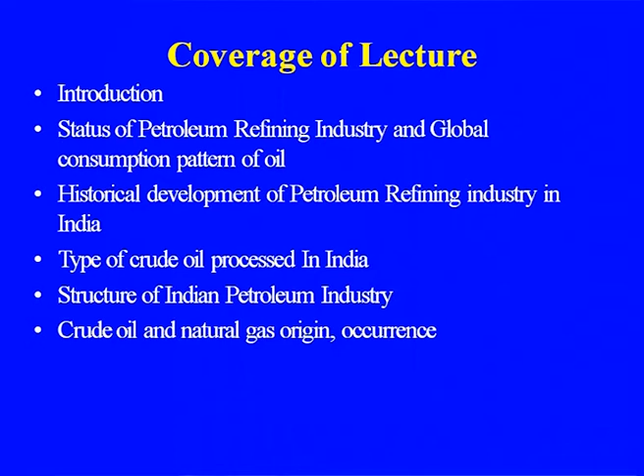Then the structure of the Indian petroleum industry, crude oil, natural gas origin, occurrence, oil and gas exploration and drilling, composition of crude oil, types of petroleum refining processes, and the changing scenario in gasoline and diesel especially.

There has been a lot of changes taking place in refinery configuration just to meet environmental standards as per the Euro norms or the Bharat norms, and the specification of gasoline and diesel that is changing time to time looking at the environmental condition.

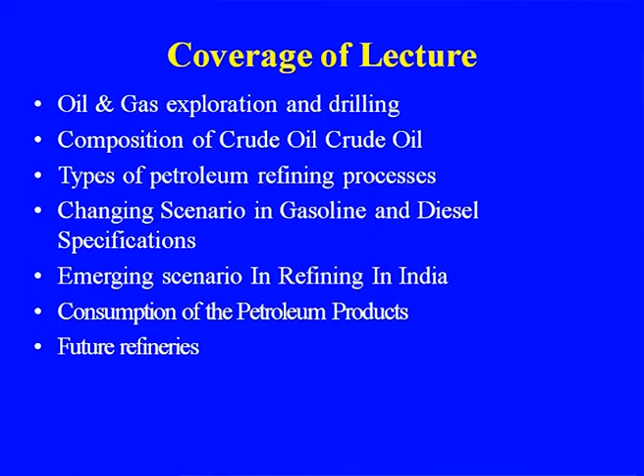Emerging scenario in the refining industry in India, because there has been a lot of changes, a lot of problems because of the non-availability of crude, volatile market of crude oil - all those factors are affecting the overall growth of the petroleum industry. We will be discussing some of the problems which we are facing.

Then the consumption pattern of petroleum products, because the various uses are very important in case of petrol. Each and every drop of oil, each and every barrel of oil is very important, and if you are not utilizing it properly, then the overall economy of the refining is definitely going to be affected.

And the future refining - because the concept is now changing, to have more value added products and to incorporate the various developments taking place, keeping in mind the environment, keeping in mind the availability of raw materials - all those factors we will be discussing as the concept of future refining.

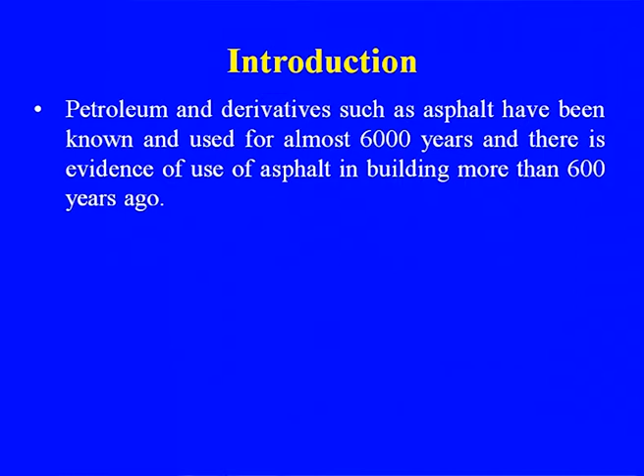Let us come to petroleum refining. Petroleum and derivatives such as asphalt have been known and used for almost 6,000 years, and there is evidence of use of asphalt building more than 600 years ago. But it was not actually known as petroleum - some oil was just available.

Modern petroleum refining began in 1859 with the discovery of petroleum in Pennsylvania. This is near New York, you can say - just side of New Jersey, one side is Pennsylvania, another side is New Jersey.

So this is Pennsylvania, and subsequent commercialization of the various processes - there is a lot of change in the process of refinery operation, which we will discuss through the whole petroleum refinery lecture, containing 8 lectures covering different sections and developments. The exploration of petroleum originated in the latter part of the 19th century.

So as far as the petroleum industry is concerned, now you cannot survive, you cannot imagine a life without petroleum products. Petroleum industry is playing a vital role in industrialization and urbanization and meeting the basic needs of mankind.

By supplying energy for domestic purposes, for industrial purposes, for transport sectors, and we are finding the revolution in the automobile industry because of the availability of more and more fuel, and at the same time some of the products which are available.

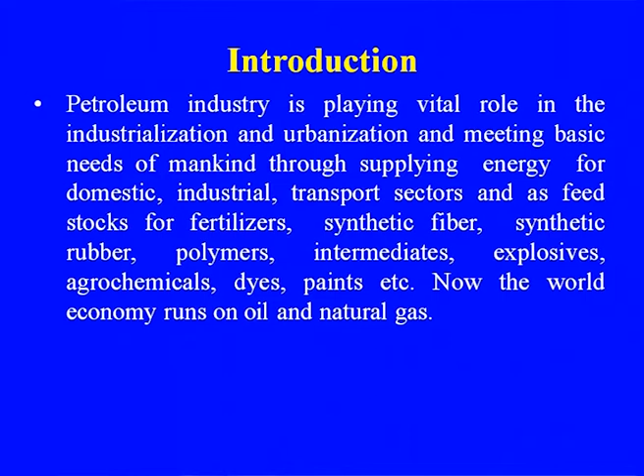And as feedstock for the fertilizer, synthetic fiber industry, synthetic rubber, polymers, intermediates, explosives, agrochemicals, dyes - these are all we will be discussing in much more detail while discussing module 7 and module 8, where we will be discussing the petrochemicals which are derived from the petroleum industry.

Already we discussed some of the chemicals which can be produced through the non-petro route, based on the utilization of biomass, utilization of ethanol, or the coal gasification, coal to chemical route. All those things we discussed, but here in module 7 and module 8 we will be discussing the development that has taken place because of the coming of petroleum products. So intermediates, explosives, agrochemicals, dyes, paints, all those things will be discussed.

Now the world economy runs on oil and natural gas, because any industrialized country, anywhere, cannot survive without oil and natural gas. We are using it in some other form, whether you take LPG, gasoline, or diesel - the whole transportation sector is depending upon diesel, because that is the only alternative route now left.

And it is the economic way of transportation of raw material for various products. So the importance of the petroleum refinery you can just imagine, because it is not only providing fuel or energy, but it is also providing a very important role through the raw material which is available to the fertilizer or petrochemical industry. Intermediate, explosive, all those industries are using the product produced from the petrochemical industry.

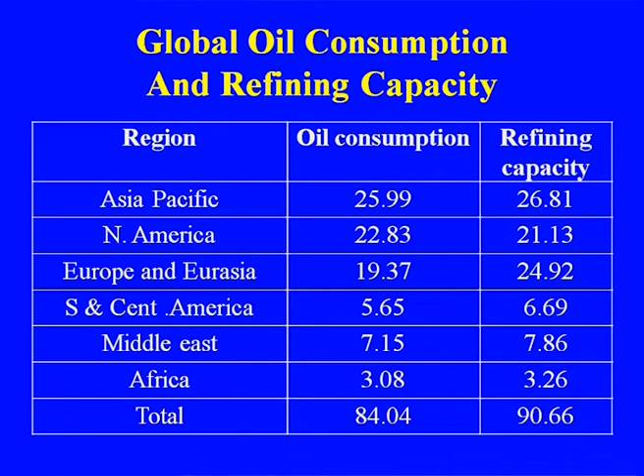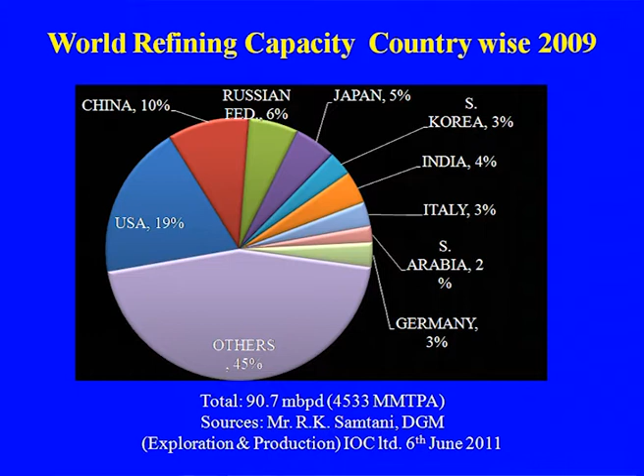And then the world refining capacity, country wise, this is the figure that we are having. So from this figure you can see the US has the major share, but one of the interesting things is that although other countries - it may be America or Southeast Asia - are having large refining capacity and producing, the basic raw material which we are producing is only from the Middle East and some other parts of the world. So the major suppliers of the raw material are the Middle East.

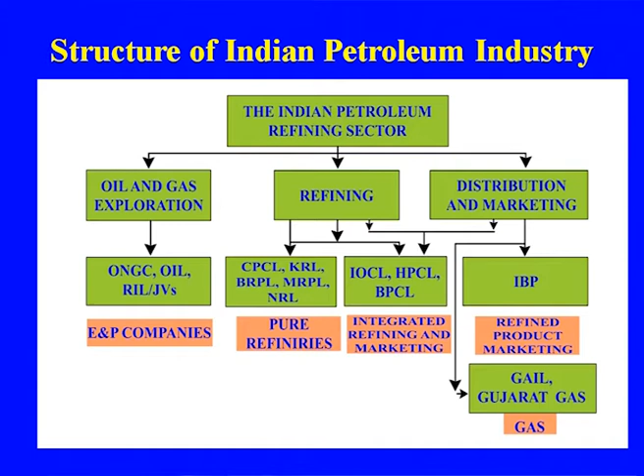Refining - a large number of refineries we are having, and new refineries are coming. Then the marketing, because refining we are having under private sector and public sector, there is distribution and marketing of the products. Some organizations were developed just for marketing - take the case of IBP, they are not having any refining, but they are doing the marketing part.

Apart from this, the Indian Oil, BPCL, HPCL, they are all having their own marketing distribution system. So this is about the structure. And one of the major players in case of gas distribution is GAIL, which supplies the gases being processed at various parts of the country through pipelines.

And one of the gas pipelines available through GAIL was the HBJ pipeline. Long back they started supplying natural gas to some fertilizer plants, that is your Hazira to Bijaipur and Jagdishpur pipeline. That is when the fertilizer plant based on natural gas was started by Birlas at Jagdishpur.

So, let us now discuss, because we will be going in detail about each and every process in the next few lectures, but this is just a summary introduction to the petroleum refining industry which we are discussing in this lecture.

So, all steps of the petroleum industry start from the oil exploration to the refining of the crude oil and the final marketing of the products which are produced in the refinery, because some of the raw material is going as a fuel and others are going to petrochemical complexes. One of the developments which has taken place in the chemical industry, organic chemical industry, has been the coming of the naphtha cracker and the LAB. We discussed LAB where we are using the kerosene.

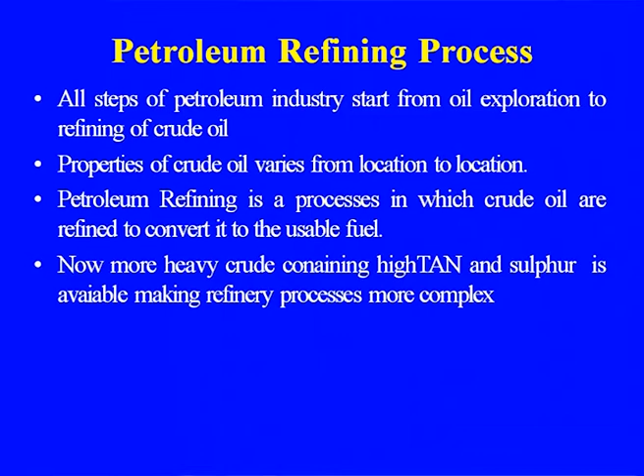Now, more heavy crude containing high TAN, high total acid number, and sulfur is available, making the refining process more complex, because with heavier crude you will have to go for the processing of the heavier fractions, and the yield of the heavier fraction will be more.

At the same time, another requirement because of the use of high TAN and high sulfur containing, or what we call sour crude, is the desulfurization process. Desulfurization was not there in old refineries, but now it is an integral part, just to meet the environmental standards, Euro 1, Euro 2, Euro 3, and now we are going for Euro 4. Some countries have gone for Euro 5.

So, our environmental standards are becoming more and more stringent with respect to the emission of sulfur compounds from the gases and other compounds. Just take the case of benzene reduction: continuous reduction in the benzene emission standards is being implemented.

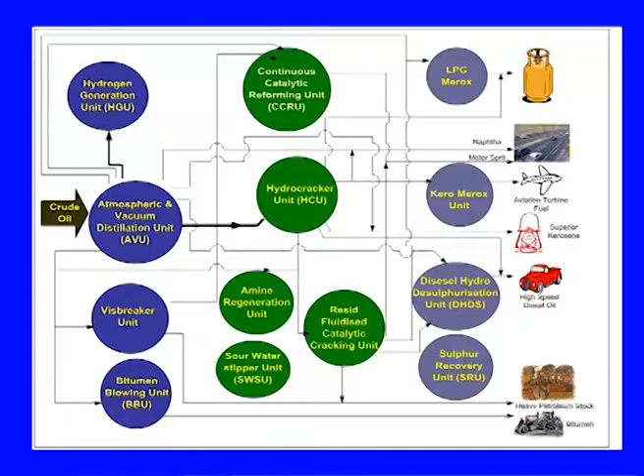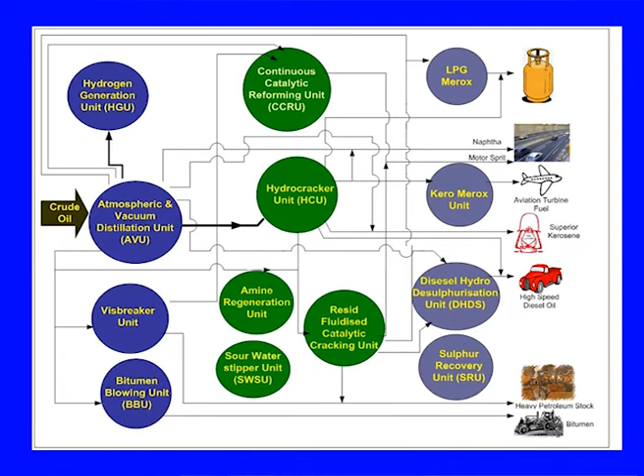So kerosene and diesel: the diesel we get may be straight-run or from the cracking process. The importance of the middle distillate is there because huge amounts of these products, especially diesel, are used in the transportation sector. This is the alternative to railway transport, and that is the reason for the importance of diesel. But in all cases, whether it is kerosene, LPG or gasoline, we have the desulfurization process just to meet the environmental norms.

Sulfur recovery is again an integral part of the refinery, because a lot of sulfur compounds are emitted. Those sulfur compounds are converted to a more useful product, sulfur, and that sulfur can be used in the chemical process industry.

If you see the various products we are getting, look at the octane number. The octane number requirement has changed a lot, because initially the requirement was low, but with newer vehicles the octane number requirement has increased. We are getting LPG, naphtha, motor spirit, or what we call gasoline or petrol, because petrol is not actually what we produce as such.

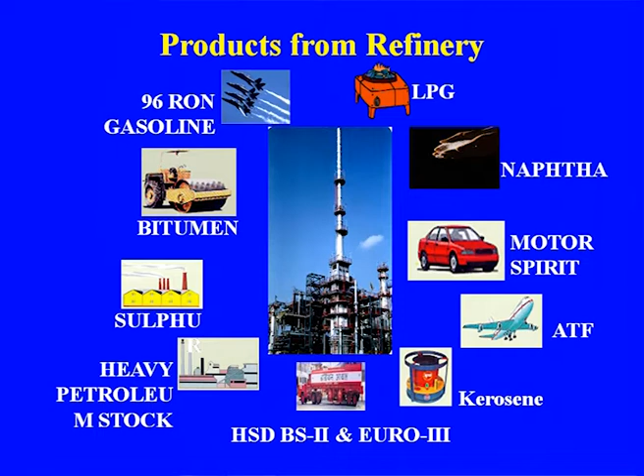This is actually the commercial name of gasoline, and the blend is blended gasoline or reformulated gasoline, where we also add various additives, antioxidants, and finally the product you get is petrol, which earlier was also called motor spirit. Aviation turbine fuel, kerosene; still a huge amount of kerosene is used for illumination, especially in rural areas, because electricity is not available 24 hours.

So people use a lot of kerosene for illumination as a fuel, and then heavy petroleum stock like bitumen that we use in making roads. These are some of the products which are used directly. Others, like naphtha or kerosene, go to petrochemical complexes, where naphtha goes for naphtha cracking, and kerosene for separation of the paraffins.

Even one product not shown here: we also get wax from petroleum. We call it petroleum wax, only where we process more paraffinic crude, just like Assam Oil Company, Digboi, which has a wax unit and has been producing wax from the very beginning. The more paraffinic, the more wax content there will be.

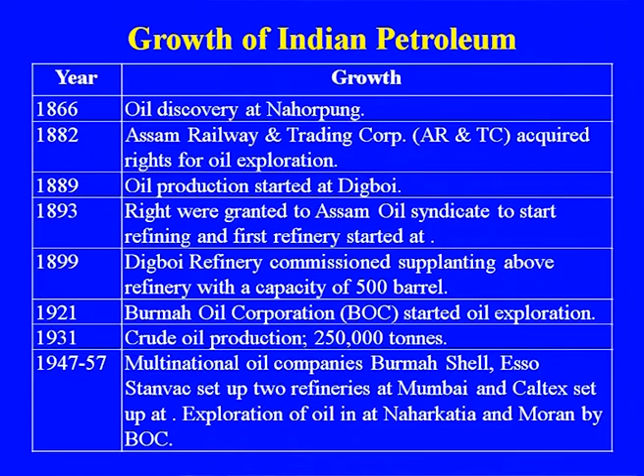Then it was Burmah Oil Company, which started oil exploration in India, part of the same Assam Oil Company. Crude oil production in 1931 was very low, and from 1947 to 57 there was a lot of development in oil exploration. Multinational oil companies Burmah Shell and Esso set up 2 refineries at Mumbai. First it was Assam Oil Company, then Burmah Shell, now BPCL, and the other by Esso is now Hindustan Petroleum. These were some of the earlier refineries.

And exploration of the oil in Naharkatia and Moran. This is the place near Dibrugarh, where again one large cracker plant is coming, because a lot of gas is available, and that gas was still not being utilized.

And you can see how, because of political reasons, there was no cracker plant, no petrochemical complex except Assam Petrochemical, where they are using natural gas for making methanol. Another unit that was started during the initial stage was Namrup Fertilizer, where they are making fertilizer. So this is another development that was there.

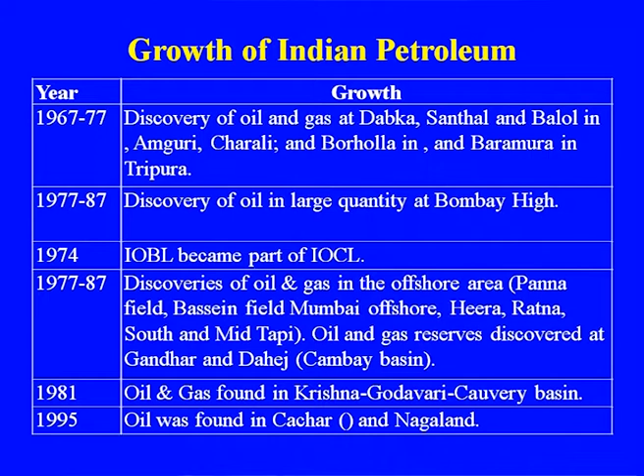This all in Assam, and then in Tripura also oil and gas was found. Discovery of oil in large quantity at Bombay High, that was actually the change which took place, and offshore drilling was started, and then the IOBL became part of the IOCL. Discovery of oil and gas in the offshore areas of various places, that is the Panna field, Bassein field, Mumbai offshore, Heera, Ratna, all those in Maharashtra.

Oil and gas reserves were discovered at Gandhar and Dahej. This is in Gujarat, where we have the petrochemical complex by Reliance. Earlier it was IPCL; now we are going to have one petrochemical complex by ONGC also there, because a lot of gas is available.

Oil and gas were found in Krishna Godavari, where every time there is a dispute with Reliance. Although it was started earlier by ONGC, Reliance also discovered gas in this region, and the real change in oil and especially natural gas was by the availability of gas in this region. And then there was also oil in 1995 in Cachar and the Nagaland area.

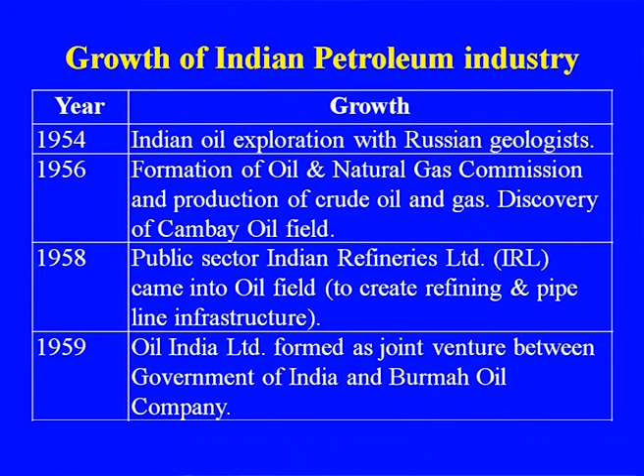1954, Indian oil exploration with the help of Russian geologists. 1956, formation of the Oil and Natural Gas Commission; public sector Indian refineries came into the oil field. Oil India was the joint sector; earlier it was under the Assam Oil Company. So, in 1963 the first public sector refinery started at Guwahati, because there is a pipeline where crude oil is supplied from Assam, Naharkatia, Duliajan to Guwahati, and it was also supplied to the Barauni refinery. Earlier they were using all Assam crude.

So these two refineries came, and later it was the Bongaigaon Refinery and Petrochemicals, and as per the Rajiv Gandhi Assam Accord, the Numaligarh refinery was started in Assam. So this is about the Indian Oil Company; Indian Oil Company merged, which I told you, the IRL.

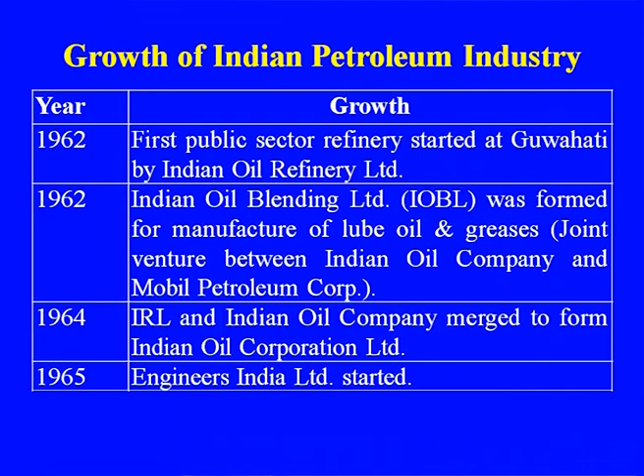Engineers India was started in 1965, and Engineers India has played a very important role in the development of especially petroleum refining and petrochemicals, although they are also involved in the fertilizer sector. These are the three major sectors under the public sector, and Engineers India played an important role in erection and commissioning. An R&D center of EIL is also there, and they did a lot of research work in extraction, development of some catalysts and some processes in collaboration with the Indian Oil Corporation R&D division, Faridabad.

So in 1998 the Assam Oil Company became Indian Oil; earlier it used to be named Assam Oil Company, now it is IOCL, Indian Oil Corporation. The first joint sector was Mangalore Refinery and Petrochemicals, started at Mangalore by Birla, and now it has been taken over by ONGC. Then in 2000 the Panipat Refinery of Indian Oil Corporation was commissioned, Reliance Petroleum Refinery commissioned, Numaligarh Refinery; in between, other refineries also came up to 2006.

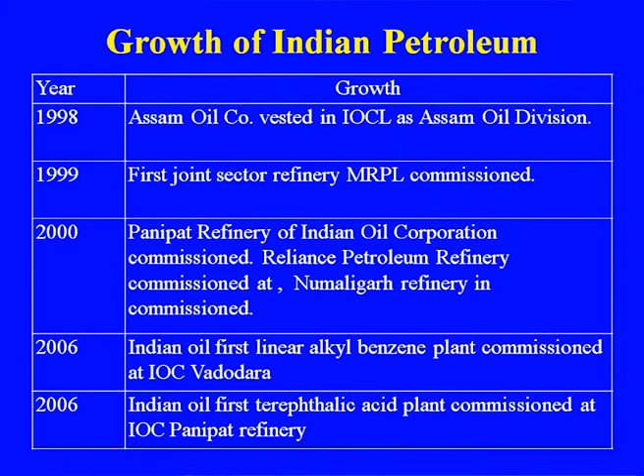Indian Oil's first linear alkyl benzene plant was commissioned at IOC Vadodara. We discussed LAB; that was the first plant based on this solid catalyst that was started. In between, Mathura Refinery and other refineries also came into existence. Indian Oil's first terephthalic plant was started by IOC Panipat Refinery.

In 2006 ONGC entered petroleum refining, by acquiring MRPL, as I was telling. And in 2010, or 2011 you can say, the HPCL Bathinda Refinery, with the collaboration of Mr.

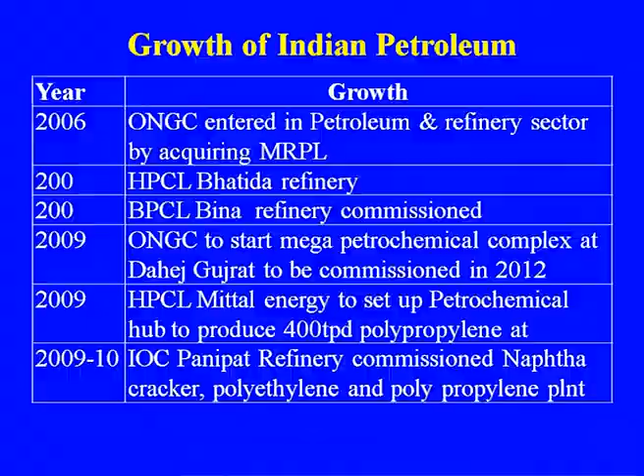Mittal, Lakshmi Mittal, that was there. BPCL Bina Refinery in Madhya Pradesh has been commissioned, that is again in 2010. In 2009, ONGC to start a mega petrochemical complex at Dahej. So that is the plant expected to be commissioned at Dahej, where the Reliance petrochemical complex is there. Earlier it was IPCL, the 4 units; after the coming of the Nagothane unit, it came at Gandhar.

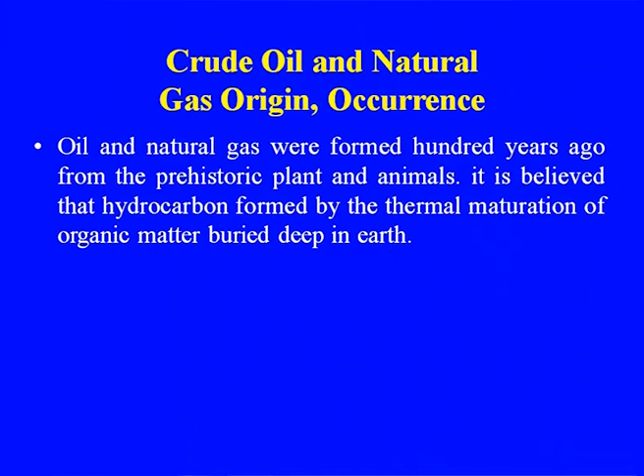So now let us come to the brief history of oil and natural gas origin and occurrence. Oil and natural gas were formed years ago from prehistoric plants and animals. It is believed that hydrocarbons formed by the thermal maturation of organic matter buried deep in the earth, just like coal formation. That took hundreds, thousands of years to transform from its original form to oil.

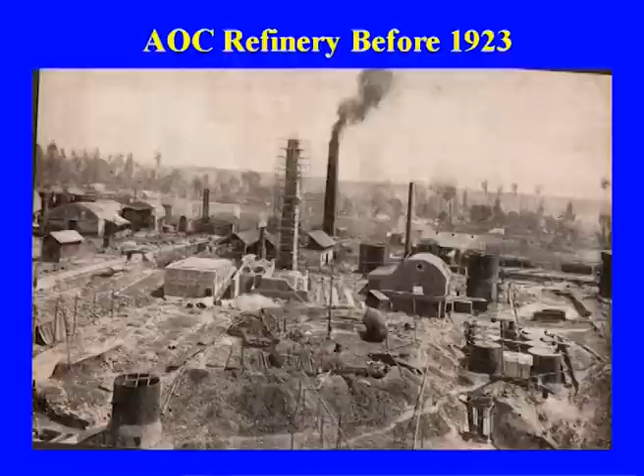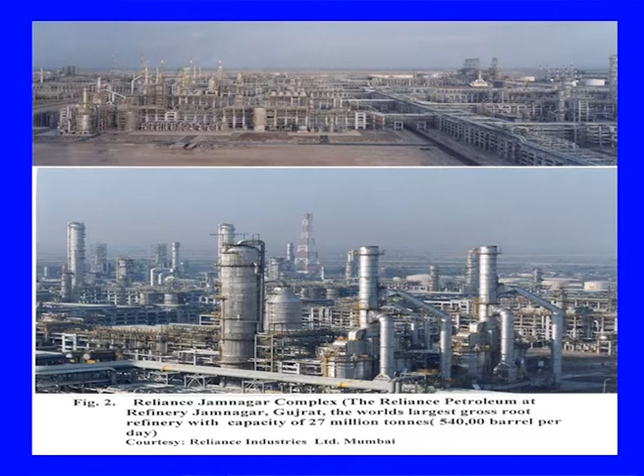This is the typical refinery when we started the first refinery in India, AOC, Assam Oil Company, in 1923. You can see the condition, how the refinery was started in an unorganized way. After that, a lot of changes took place in Assam Oil Company also. Many refineries started earlier did not have secondary processes, like catalytic reforming, which was added later. So this is the old refinery, and in a modern refinery, where earlier the capacity was 0.5 to 6, now it is around 60 plus million tons.

When the first Reliance refinery at Jamnagar was started, they started with 18 million tons. Even at that time it was considered very high compared with the existing refinery capacity in India. So it went from 18 to 30 and 30 to 60; that was how Reliance developed, and they were able to develop petrochemical complexes and at the same time capture the market of petroleum products.

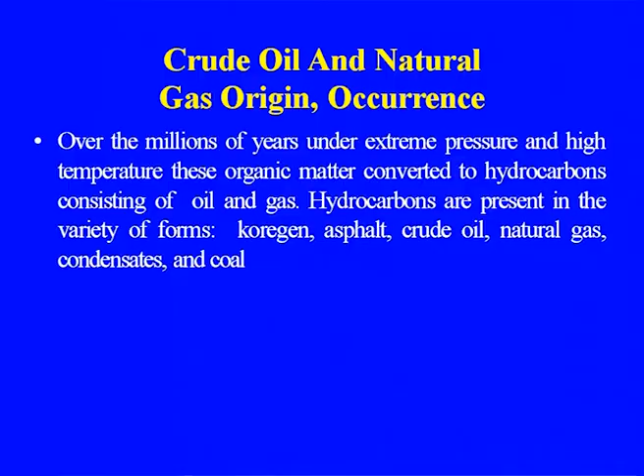So crude oil and natural gas, about whose origin and occurrence I was telling, over millions of years under extreme pressure and high temperature, these organic matters converted to hydrocarbons consisting of oil and gas. Hydrocarbons are present in a variety of forms: asphalt, crude oil, natural gas, condensate and coal. In all these you will find C and H, carbon and hydrogen, and in crude oil there may be oxygen, nitrogen, and sulfur compounds inherently present; even in coal, sulfur compounds are present. It took thousands of years to make this final material, which is now available as a fuel and petroleum feedstock.

Oil and gas production includes first exploration, one of the very important parts of crude oil production, because a lot of investment goes into exploration by various multinational companies. In India, ONGC is the major player in exploration, and whatever availability of oil and gas there is, is because of ONGC. Even Schlumberger is doing a lot of exploration, especially the search for oil in the ocean.

That is one of the important activities being done by the oil sector, because our sea is rich in resources. As I told you, it is just like the churning of the ocean done in ancient times by our gods to get the resources. So all the multinational companies and even ONGC are making a lot of effort to get oil from various parts of the sea.

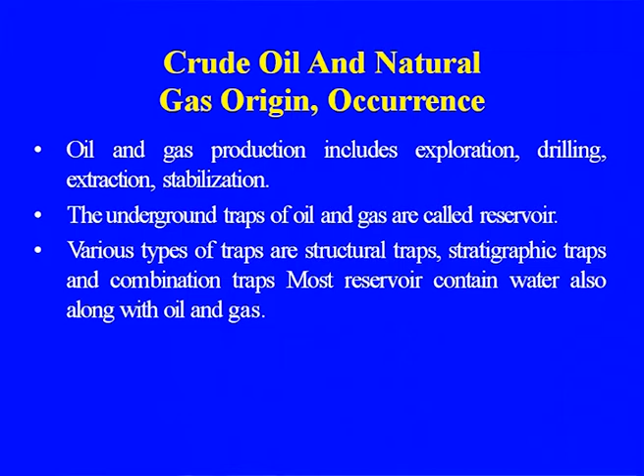Most reservoirs contain water also along with the oil and gas, and separation of the oil, separation of the condensate from the gases is done at the site before the process before it is processed at the refinery.

Earlier finding of oil and gas, as I told you, the exploration of oil is a very costly operation. So the earlier finding of oil and gas was a matter of luck and a hit and miss process. It was chance that you were getting oil. If you got oil, then you got everything. If you did not get it, then a lot of money was lost.

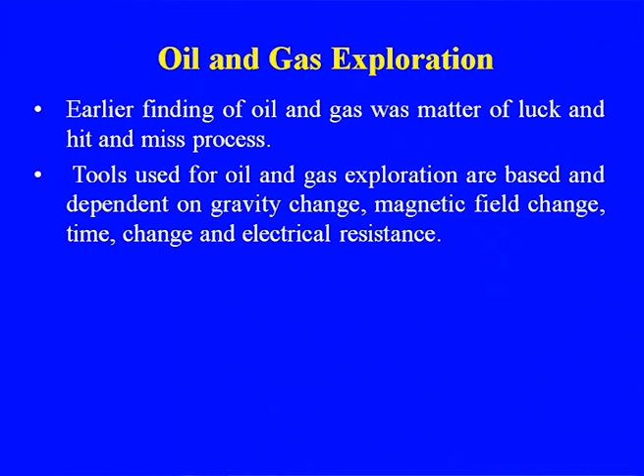So tools used for oil and gas exploration are based and dependent on gravity change, magnetic field change, time change and electrical resistance. I am not going into detail, because some of these things are already part of the NPTEL program on petroleum refinery, where it will be discussed in more detail.

Oil and gas exploration with the advent of 3-dimensional seismic technology, which is based on sound waves, has brought a lot of revolution in oil and gas exploration. This identifies the subsurface formation by reflection of sound. There has been much improvement in the identification of oil and gas traps and reservoirs.

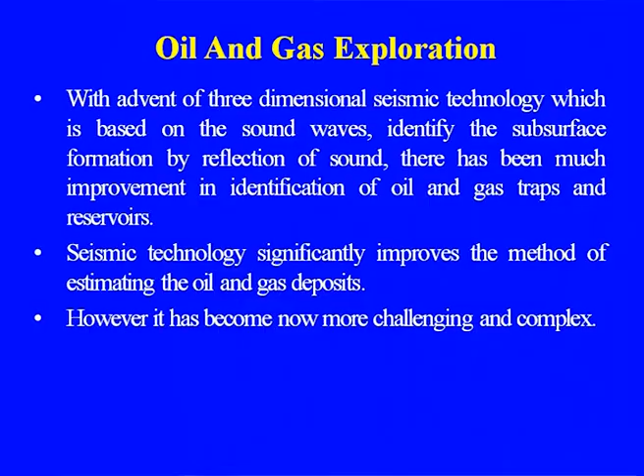Seismic technology significantly improves the method of estimating oil and gas deposits, because oil is very important - the whole economy of the world is dependent upon the availability of oil, and this is the reason why the Middle East countries are very rich, because the major portion of oil resources are there in the Middle East. However, it has become more challenging and complex because of the cost involved, and because of the depth involved.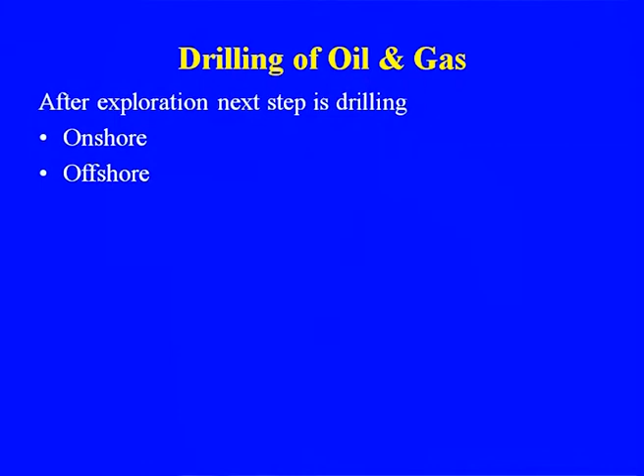After exploration, the next step is drilling, onshore and offshore. Onshore drilling was mostly vertical drilling. But now another revolution has taken place in drilling, that is horizontal drilling or hydrofracturing, and because of that we have been able to get shale gas. Whatever availability of shale gas in the US or Canada exists now is only because of horizontal drilling, which has made it a more economical way of producing shale gas.

The oil and gas coming from the well is processed at the site - this is the crude oil stabilization section. Oil and water are separated; oil goes for further processing after desalting, then goes to the refinery. Gases that we separate include lift gas, and then part of the gas, if it is natural gas, slug catcher gas, and condensate gas sweetening that we are doing.

Condensate is the heavier fraction of natural gas, and now because of the huge amount of natural gas we are processing, a lot of condensate is available, and fractionation of the condensate will yield some important aromatics also present in the condensate.

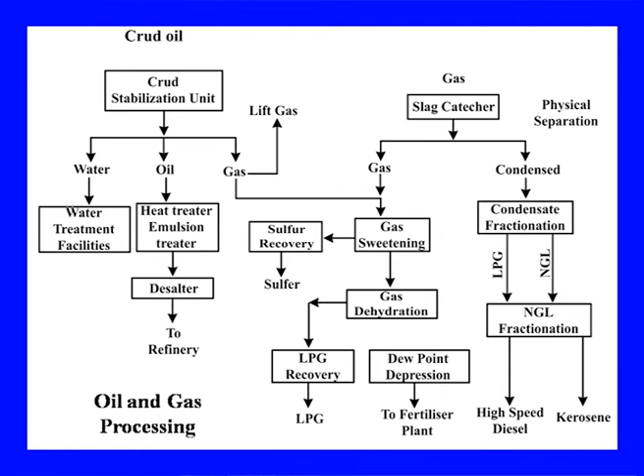Gas hydration - these are all processes done by GAIL or ONGC at the site, and gas dehydration, since mostly it is ONGC which handles this even from the initial stage - LPG recovery from the natural gas, and then NGL fractionation which I was telling you about, for getting some important products, because they contain heavier hydrocarbons.

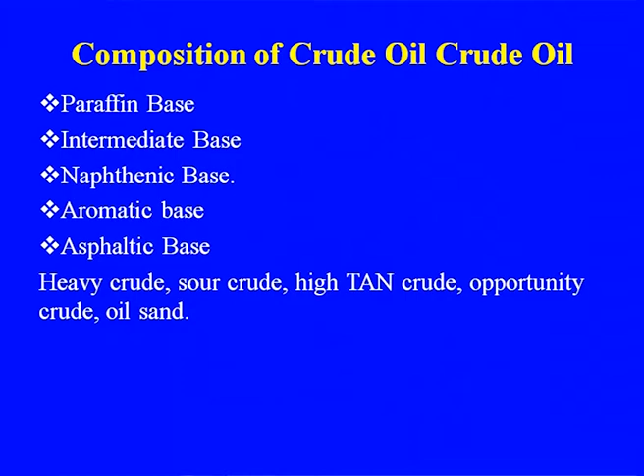Composition of oil - we have paraffinic base, intermediate base, naphthenic base, aromatic base, asphaltic base, heavy crude, sour crude, high TAN crude, opportunity crude, and oil sand, which is another important type, because it is very thick. A lot of work is being done, especially in Canada where it is available, on how to recover it, because distillation is difficult and a lot of heavy residues are there.

Similarly, in case of opportunity crude, the more sour or heavier crude is available. We have crude oil in Rajasthan which is rich and also high TAN crude. The processing will depend on the type of crude oil because the yield of various products depends on the crude oil. This plays an important role in total cost, because for naphthenic base, if you have paraffinic, the octane number will be low and naphtha has to be processed. For aromatic base, you're interested in separation of benzene, toluene from the reformer. Heavier crude is the asphaltic base.

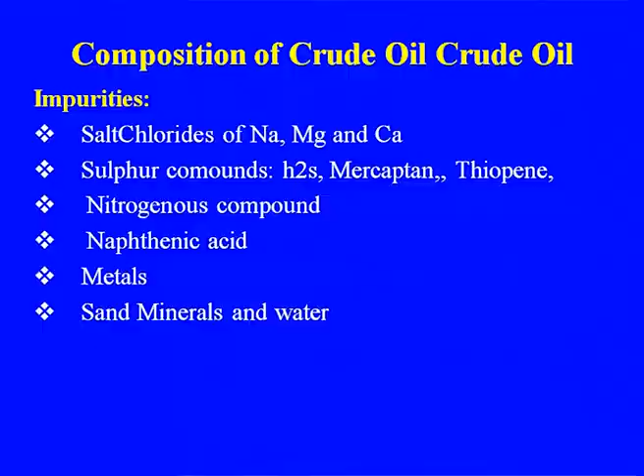These are the various constituents which are separated, and our basic objective in the refinery is just to remove the impurities. But in spite of all the desalting and pre-treatment we do, some impurities remain, and those are removed during the various refinery operations.

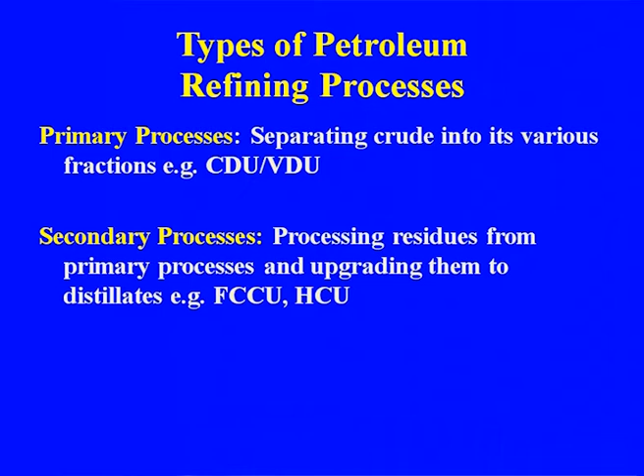These are the primary processes we do in the refinery, separating crude into various fractions. Secondary processing takes the residue from the primary process and upgrades it to distillate, like FCC, and the hydrocracker unit - these are now an integral part. Earlier, fluidization technology was developed during the 1940s by UOP, and FCC came into existence in the refinery. It moved from fixed bed technology, which was used for catalytic cracking, to fluidized bed.

Then there are residue upgradation technologies, bottom of the barrel applications, such as residue fluid catalytic cracking units, where heavier fractions are processed, and deep catalytic cracking units, DCC - all these are for upgrading the residue you obtain.

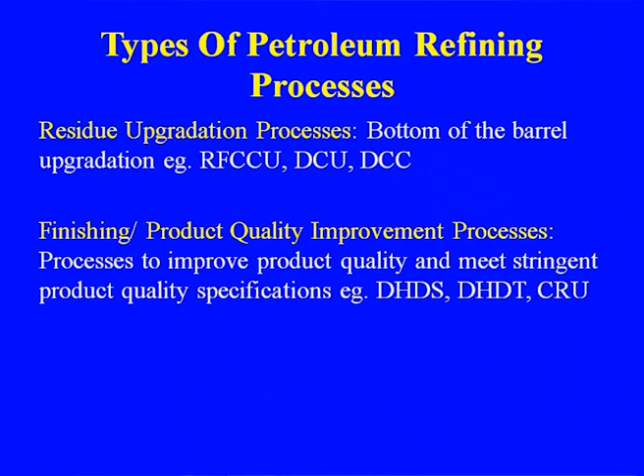Another part of the refinery is the finishing processes, finishing the product for improvement of product quality. One thing I mentioned is desulfurization, depending upon the type of crude you are processing - more sour, less sour, or sweet crude. Depending on that, you will have to treat the various products before marketing.

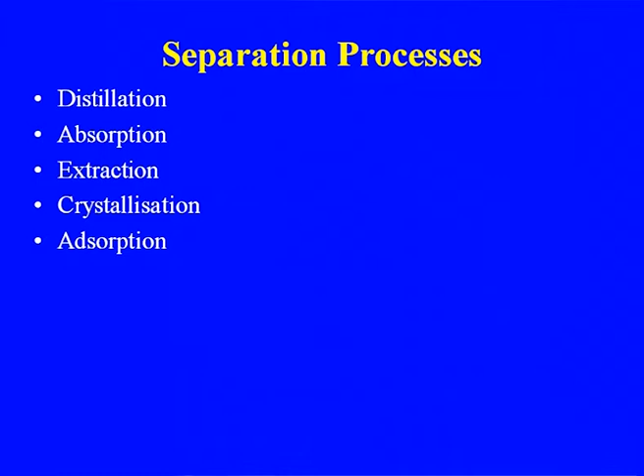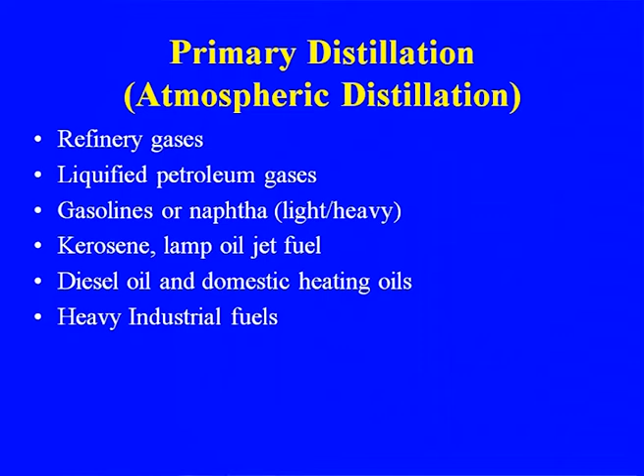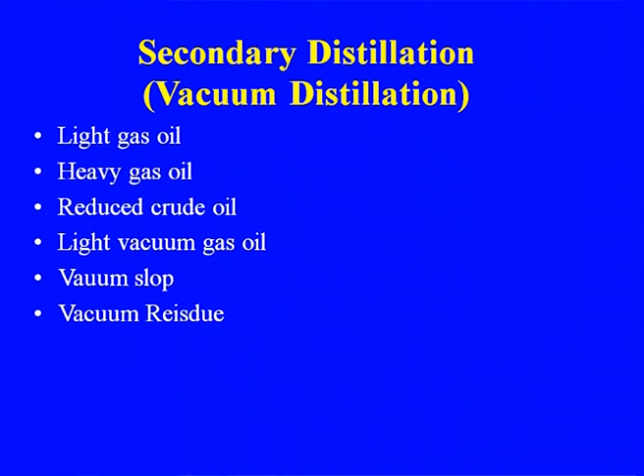These are some of the products: refinery gases, liquified petroleum gas, gasoline or naphtha - which can be light naphtha, medium naphtha, heavy naphtha. Kerosene, lamp oil, jet fuel, diesel oil, domestic heating oils, heavy industrial fuels like bitumen. Lubricating oil is also obtained from vacuum distillation, along with light gas oil which goes for further cracking, heavy gas oil which also goes for cracking, and reduced crude oil.

Light vacuum gas oil and vacuum slop, vacuum residue - lubricating oil is also separated where there is more paraffin. In some refineries, we have separate lube refineries where they process heavier crude specifically for producing lubricating oil.

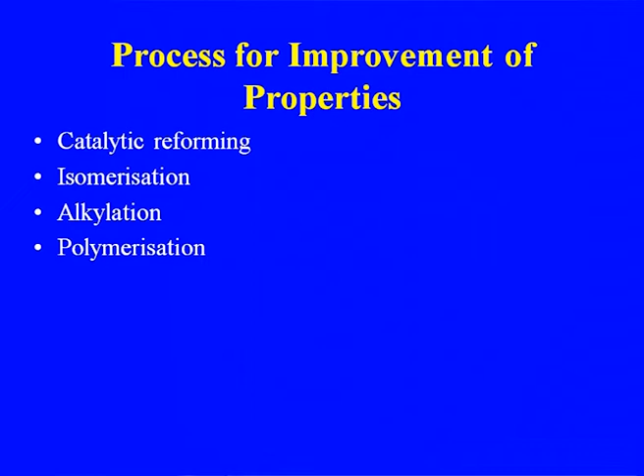These are processes for improvement of properties: catalytic reforming, isomerization, alkylation, polymerization. We will discuss all these processes in various lectures.

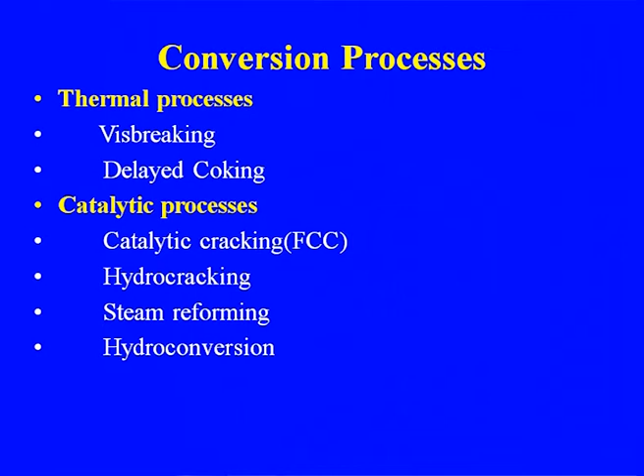These are the conversion processes: thermal processes and catalytic processes. Our objective is to use every drop of every barrel of oil. So, visbreaking, delayed coking, and advancements in thermal cracking have taken place. Catalytic processes include catalytic cracking, hydrocracking, steam reforming, and some hydroconversion processes. Finishing processes include hydro treatment and sweetening.

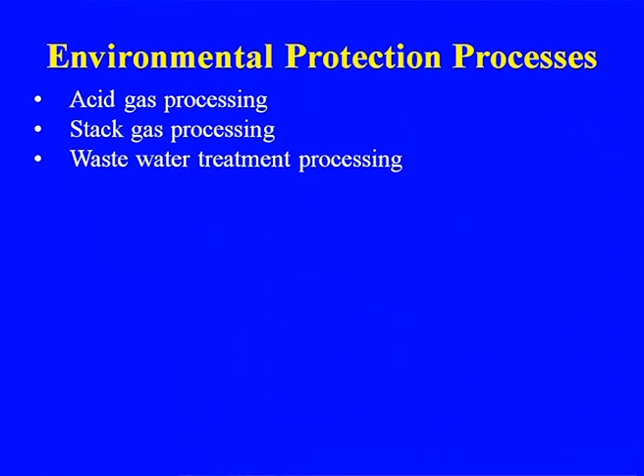From the environmental protection point of view: acid gas processing, stack gas processing, wastewater treatment processing. This is a typical refinery. Already I have discussed the products which you are getting.

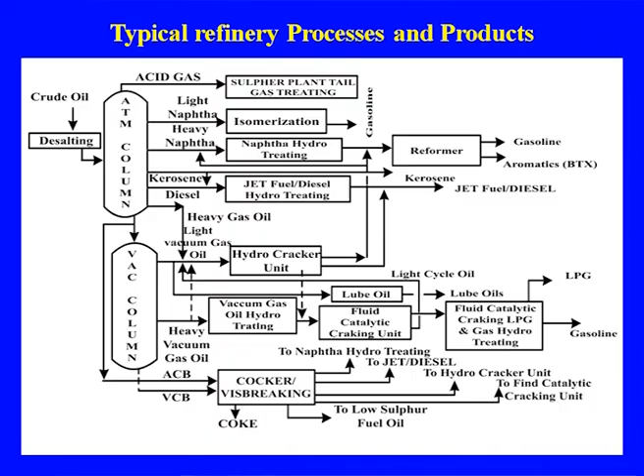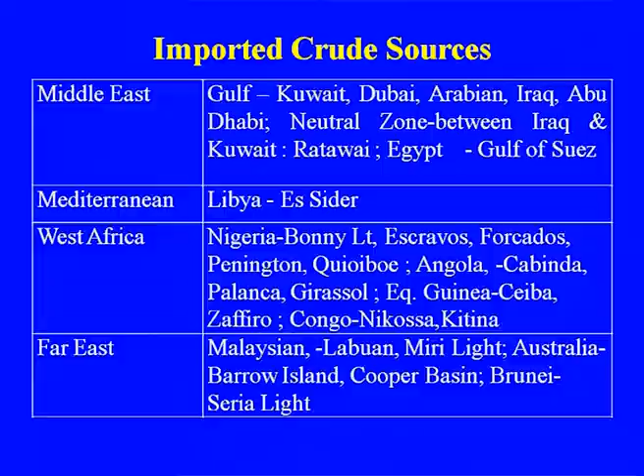These are some of the crudes which are used, from the Middle East, West Africa, and the Far East. So from various places, because our major portion of crude oil requirement, around 70%, is met through imported crude.

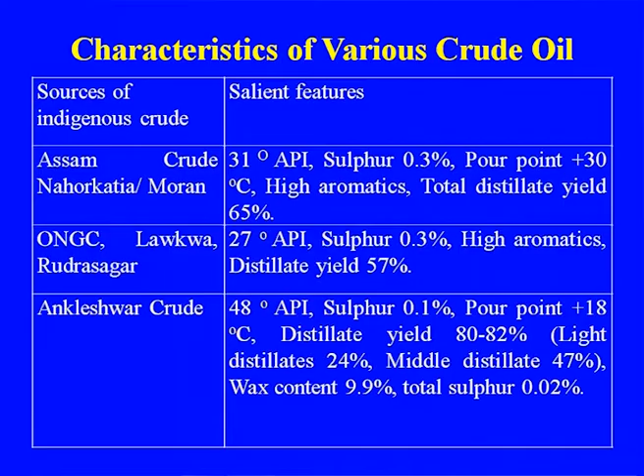This is again the indigenous crude which we have from Assam, ONGC and other parts of the country, and these are some of the salient features, the characteristics of these crudes, because crude oil evaluation is very important - that's why we have kept one separate lecture on crude oil evaluation. That will be discussed in the next lecture, lecture 2.

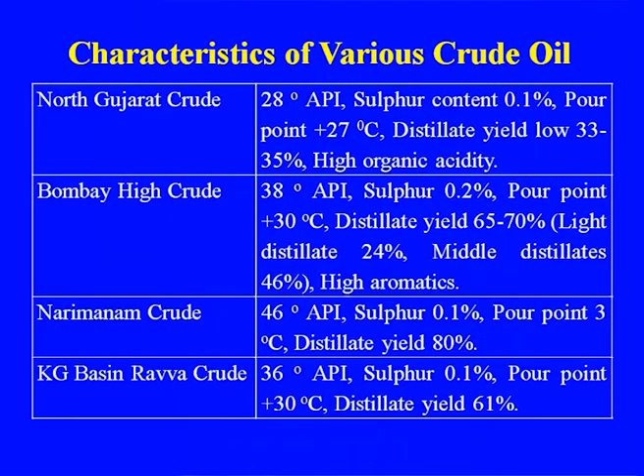This is another source from where we are getting North Gujarat crude, Bombay High crude, Narimanam crude and KG Basin Ravva crude. And these are the actual characteristics of this crude, because if you see these characteristics, it is widely changing - whether it's sulfur or API gravity, which is just the reverse of density. This is very commonly used in the characterization of crude oil, which again we are going to discuss in detail.

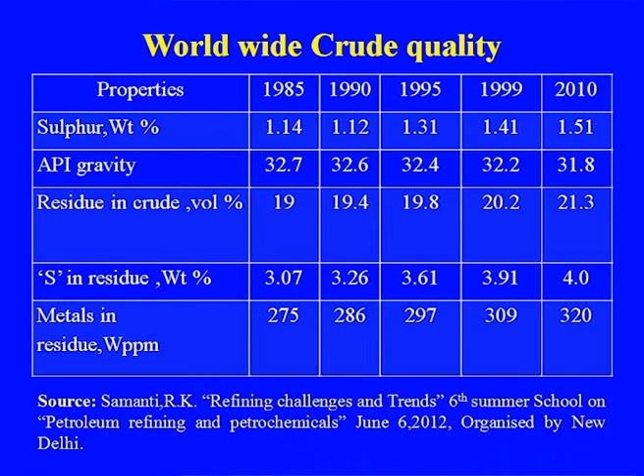Now we are having this, 32 to 31. Similarly, the residue is increasing. So this is how sulfur and residue - the residue sulfur also is increasing. So these are some of the changes we are facing because of the variation in the quality of crude, even in the refinery.

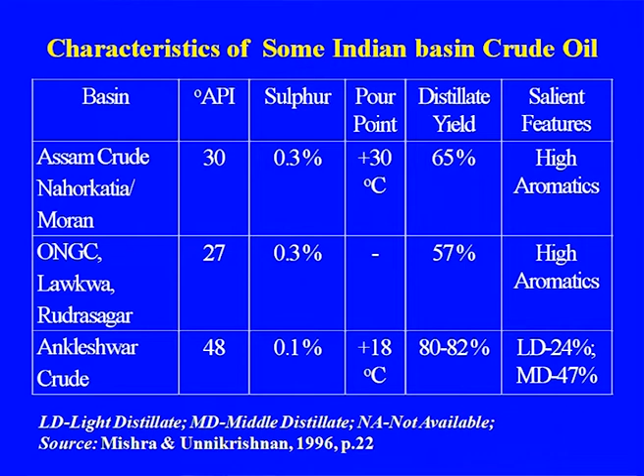Characteristics of some Indian crudes: API sulfur, pour point, distillate and high aromatics - Assam crude has high aromatics and low Ankleshwar has light distillate and middle distillate. This is the percentage, 24%, 47%, and API gravity.

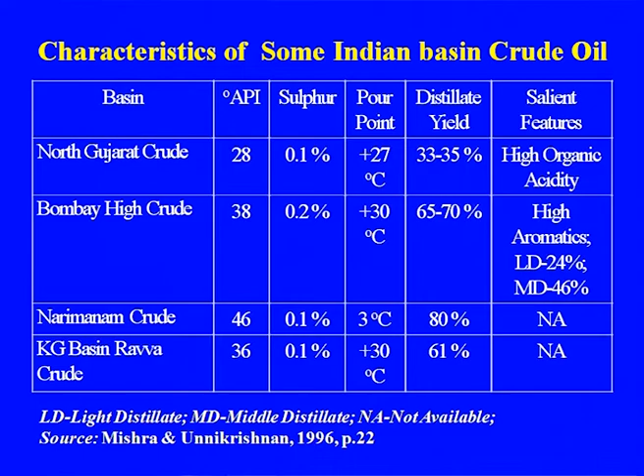Now the changing scenario, because I told you, the refinery of the 50s and refinery of today - there is a lot of change in process conditions. It is just two factors: to improve productivity, and at the same time to meet the requirement of the market and environmental standards.

So that was the first phase when we were using tetraethyl lead for improving octane number - completely phased out now. Lower RVP, Reid vapor pressure, lower benzene. Now there has been continuous decrease in the benzene content of gasoline as per the Euro norm, lower olefin content, limited oxygen content, lower sulfur content.

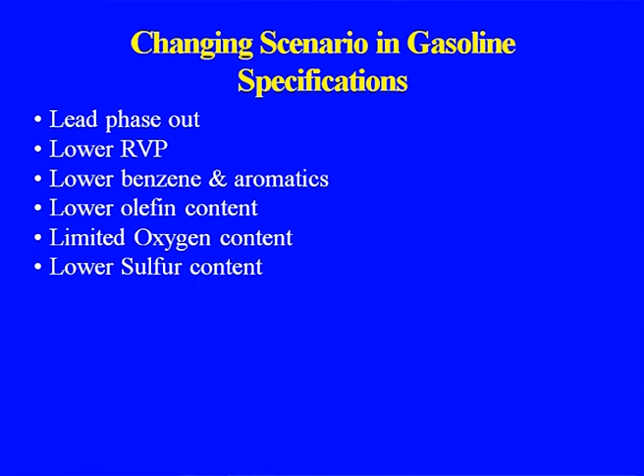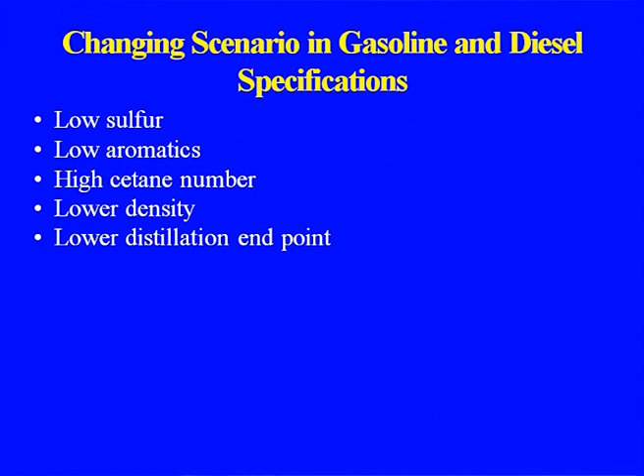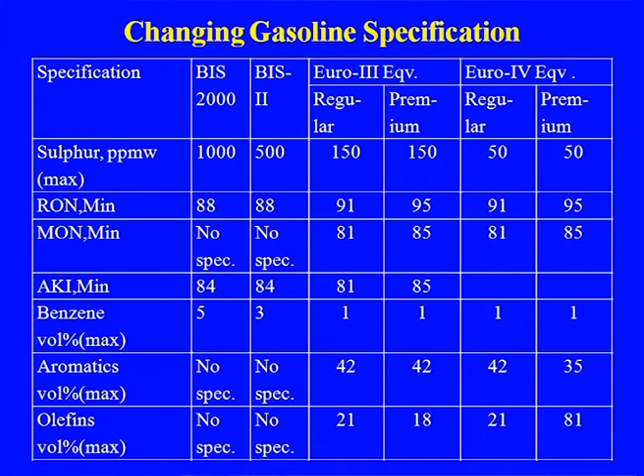So, how to maintain? Similarly, if you see your octane number, 88 to 91; even before that it was less than 88. So, this is how the change is: benzene 3 to 1, now only 1% benzene. So, some portion we are losing, which was going to the gasoline part. So, this is how the changes in the gasoline are taking place.

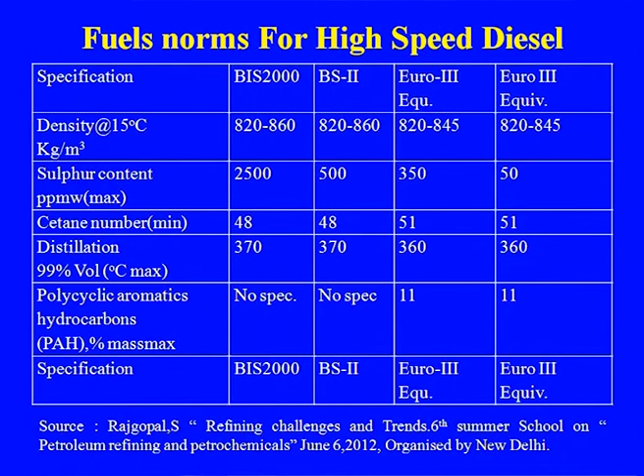Then the fuel norms, similarly in the case of the fuel norms for the sulfur content, now it is only 50 ppm, that is the maximum allowable, and this is the reason why we are having a number of desulfurization processes in the refinery.

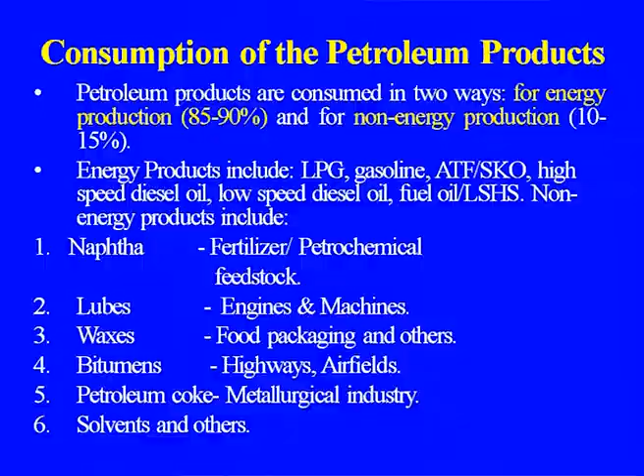Then the naphtha is being used by the fertilizer and petrochemical complexes, lubricants used for engines and machines, waxes for food packaging and other uses, also bitumen for airfields and highways, petroleum coke for the metallurgical industry, and the solvents and others. These are some of the broad applications of petroleum products.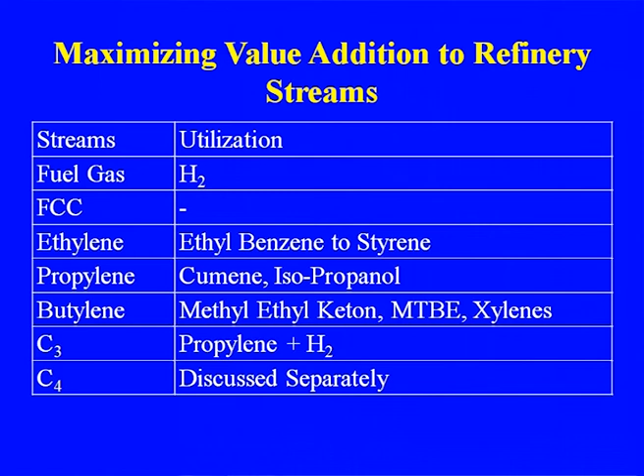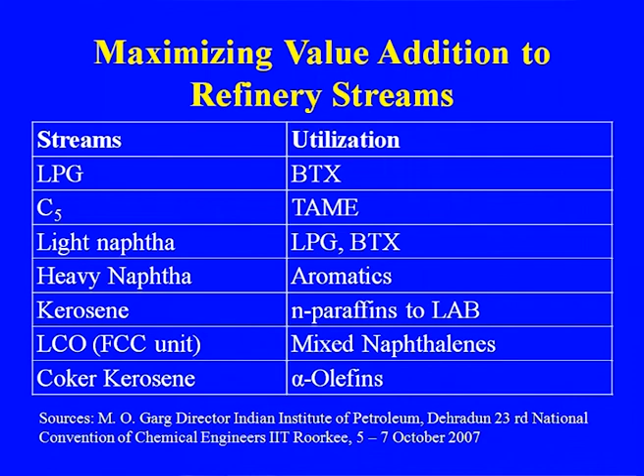The LPG, C5 stream, light naphtha, heavy naphtha, kerosene, these are all used as petrochemical feedstock, along with benzene, toluene, xylene, and LPG. So, this is some of the emerging scenario.

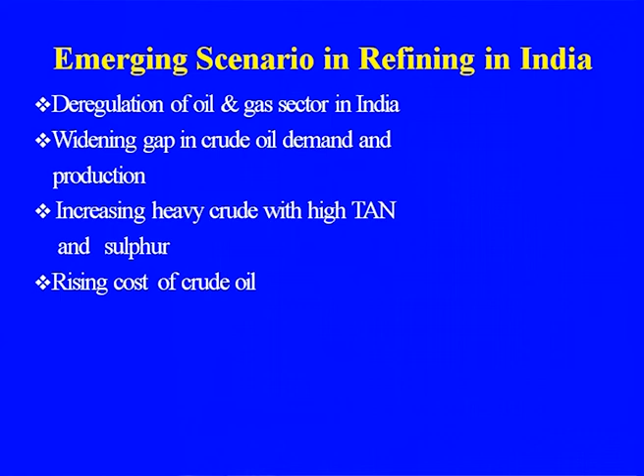Just to conclude: the deregulation of the oil and gas sector in India, the widening gap between crude oil demand and production, increasing heavy crude with high TAN and sulfur, and rising cost, because the cost of crude oil has become more volatile. Ever increasing crude oil prices, shrinking refinery margins, and stringent product specifications to meet environmental regulations and standards, which are changing from time to time.

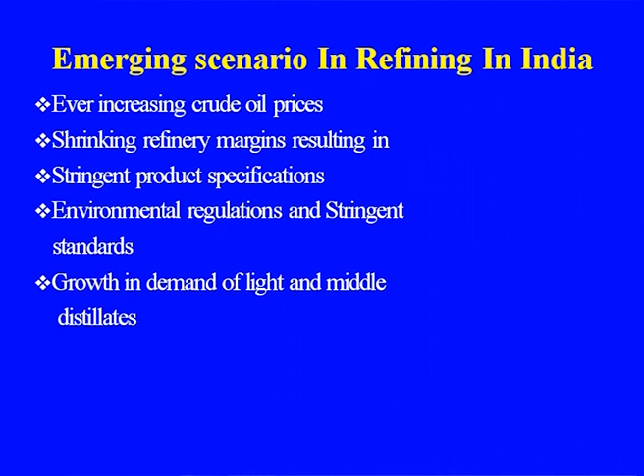Growth in the demand for light and middle distillates, because of more and more vehicles, automobiles, trucks and other things for transportation.

And now we are talking about the zero gasoline refinery, because earlier the objective of the refinery was to have gasoline and diesel. Now we are talking about zero gasoline. So, these are some of the developments taking place in the refinery, to have more and more economy, to utilize each and every barrel of oil and to utilize all the byproducts from the refinery for more value added products.